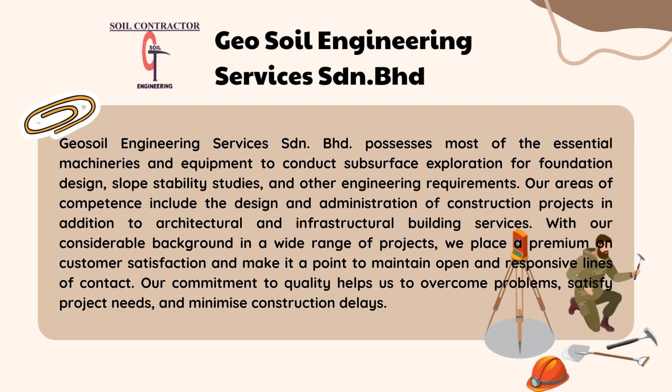Our areas of competence include the design and administration of construction projects in addition to architecture and infrastructural building service. With our considerable background in a wide range of projects, we place a premium on customer satisfaction and make it a point to maintain open and responsive contact. Our commitment to quality helps to overcome the problems, satisfy the project needs, and minimize the construction delays. We will make it a priority to work closely with our customer in order to accomplish the objective of the building project quickly. Next, I will continue about project backgrounds.

My name is Muhammad Hafiz bin Johan, and this project was located at Kawasan Bandar al-Mukhtafi Billah Shah, Paka, Terengganu. During the soil investigation, two tests were conducted to understand the soil. First, standard penetration test or SPT. A test was done to measure the soil strength at different depth. A special tool was used to collect soil samples, and the resistance was recorded by counting the number of blows needed.

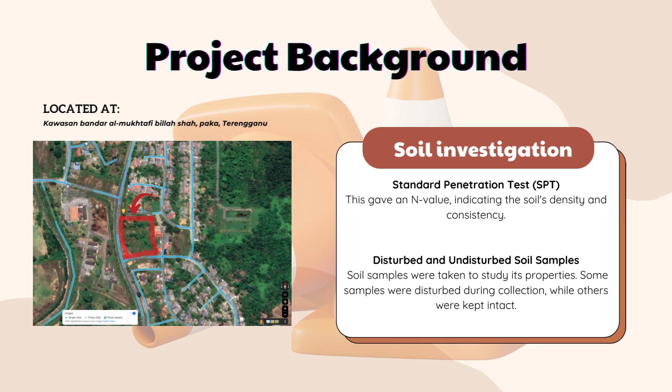And second test is disturbed and undisturbed soil samples. Soil samples were taken to study its properties, and some samples were disturbed during collection while others were kept intact. In the laboratory, two tests were performed: direct shear test and Atterberg limit test.

Okay, next is project structure. The work on the school building soil research at Paka, Terengganu is covered in this section. The purpose of this research is to collect geotechnical engineering data regarding the ground under the site, which will be utilized to guide the design and assessment of the proposed structural foundation. At the site, 4 boreholes and 4 Mackintosh probe tests were performed. The deep borehole was progressed using the rotary boring machine.

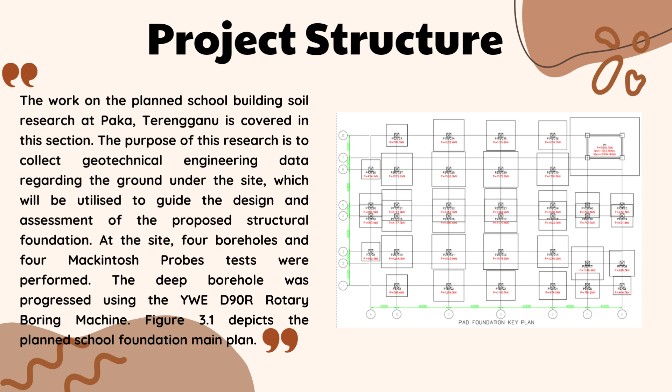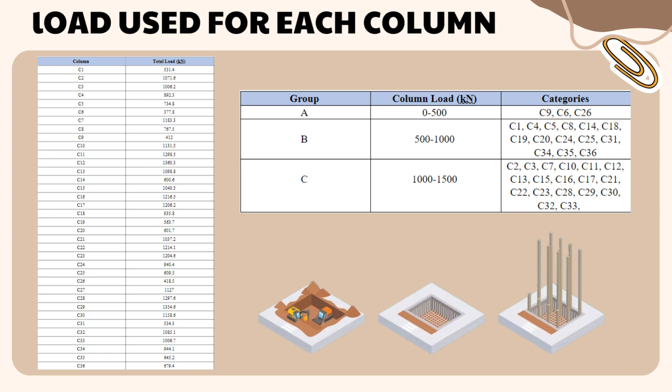Figure 3.1 is the planned school foundation. This is the load used for each column. So as we can see, this is all the columns with their own load. Okay, then we categorize them into 3 groups: group A, the load is from 0 to 500, B is 500 to 1000 kilonewton, and the last one, group C, is 1000 to 1500.

Next, I will explain a little bit about bore log. So a bore log is a record documenting the conditions and characteristics of geotechnical exploratory activities such as mining and drilling boreholes. Visual inspection and geotechnical logging equipment are utilized to collect samples and obtain data along the drill axis.

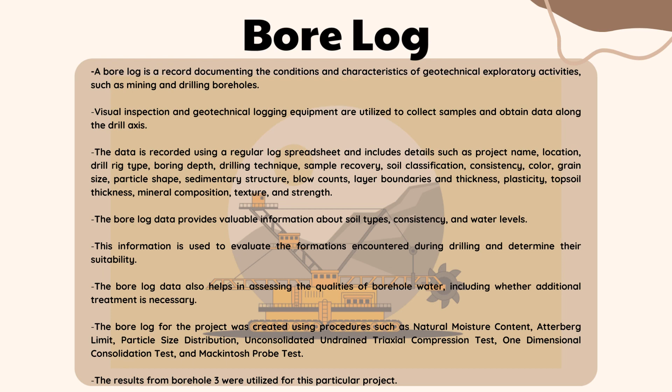The data is recorded using a regular log spreadsheet and includes details such as project name, location, drill rig type, boring depth, drilling technique, sample recovery, soil classification, consistency, color, grain size, particle shape, sedimentary structure, blow count, layer boundaries and thickness, plasticity, topsoil thickness, mineral composition, texture and strength.

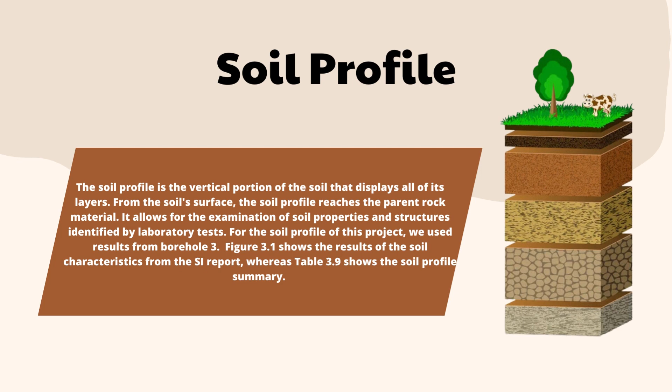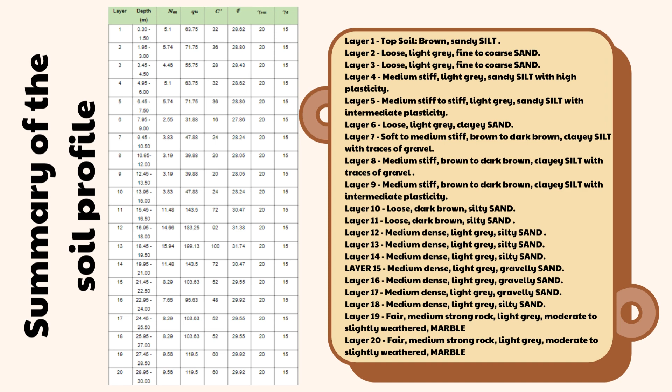And then layer 15 to layer 17 is medium dense, light grey, gravelly sand. And then layer 18 is medium dense, light grey, silty sand. And then layer 19 and layer 20 is fair, medium strong rock, light grey, moderately to slightly weathered marble.

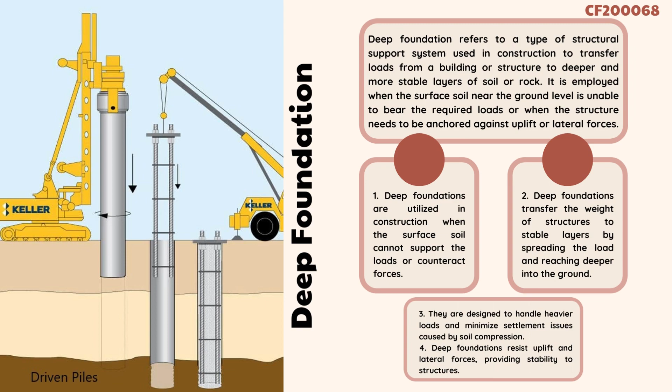In this chapter, I will explain about the deep foundation that has been selected in our project. Deep foundation refers to a type of structural support system used in construction to transfer load from a building or structure to deeper and more stable layers of soil or rock. Deep foundation is used in construction when the surface soil cannot support the load. They are designed to handle heavier loads and minimize settlement issues.

Next, in our project, we have opted to design the foundation using pile foundation. Pile foundations are a type of deep foundation that utilize long and slender structural elements. Piles are installed into the ground through various methods such as driving, drilling or casting them in place. The primary purpose of pile foundation is to transfer the load from the structure to more competent soil or rock layers at greater depth. That's all from me.

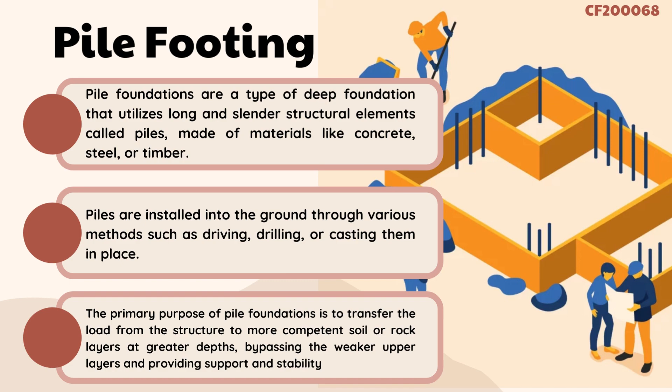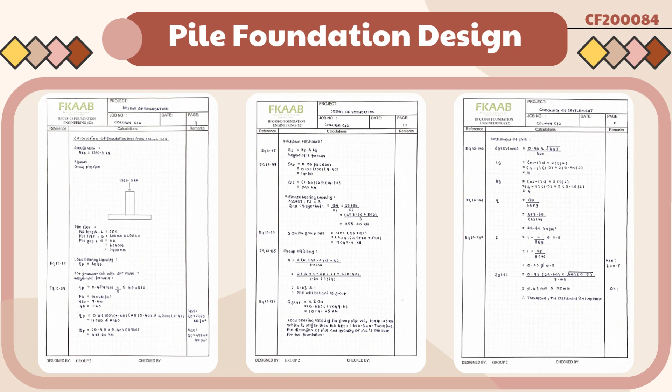Today, I will explain the parts of pile foundation design. This is one example of the calculation for designing pile foundation in this project. This part is the detailing for the pile foundation design. The size for this pile is 400 mm times 400 mm. For design checking, we have three foundations that we chose, which are C26, C34 and C12. All of the proposed sizes for these piles are 400 mm times 400 mm.

The value of the NED in kilonewton for the three selected pile designs is 418.50, 944.4, and 1360.30. For the conclusion, the settlement check for all the pile designs is okay.

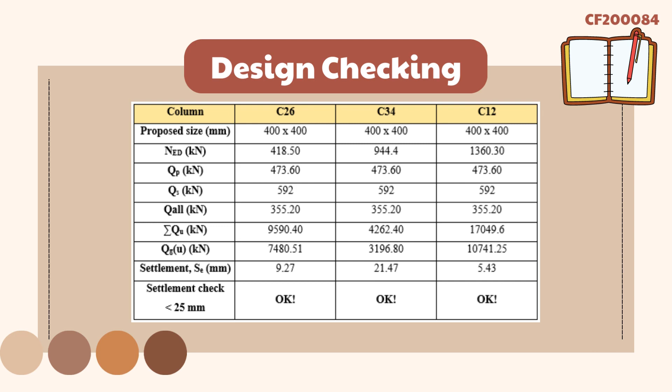I will present the last chapter of the project. So, for the discussion part, in this project, we conducted a detailed calculation for the design of pile foundation. We analyzed the loading from various columns using advanced software known as STAAD. By accurately assessing the loads, we were able to determine the necessary design requirements for the pile foundation, ensuring its

stability and structural integrity. The proposed column sizes for this project were 400 x 400 mm, and we took into account various parameters such as the load on the pile from the column and soil, ultimate load on the pile, and settlement. Settlement is a critical aspect of foundation design as it determines the stability and performance of the structure over time. I am pleased to inform that the settlement check yielded positive results.

The settlement value we obtained was 21.47 mm, which is well below the specified limit of 25 mm. This indicates that the pile foundation meets the settlement requirements and ensures the stability and reliability of the structure.

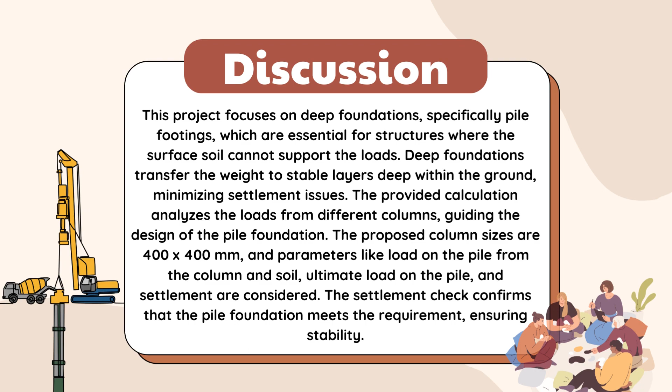Next, for the conclusion, in summary, the report highlights the importance of thorough site investigation and soil testing for designing a strong foundation. This project focused on designing the foundation for a school building in Paka, Terengganu. The investigation involved analyzing soil properties to determine the appropriate foundation type. Factors like design considerations, bearing capacity, settlement, and soil improvement measures were carefully considered.

Field exploration and testing involved methods like standard penetration tests to assess soil carrying capacity. Disturbed and undisturbed soil samples were collected for comprehensive analysis, including shear strength and consistency tests. The project structure included borehole and test details, and the loads applied to each column were categorized for design purposes.

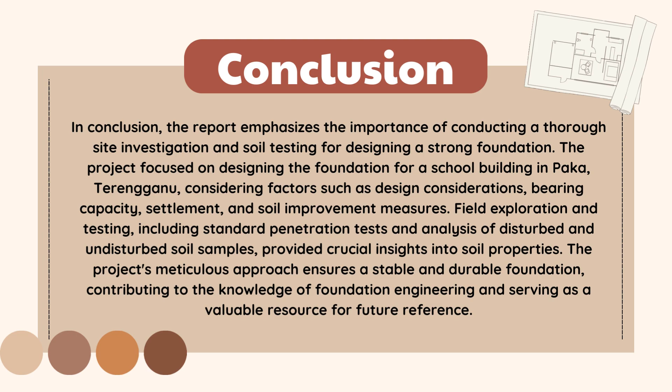Overall, the project followed a meticulous approach to ensure a stable and durable foundation. The findings contribute to the knowledge of foundation engineering and serve as a valuable resource for future reference. That's all from us. Thank you for your attention, and I hope our presentation has provided valuable insights into the significance of deep foundations and their role in constructing stable and reliable structures.